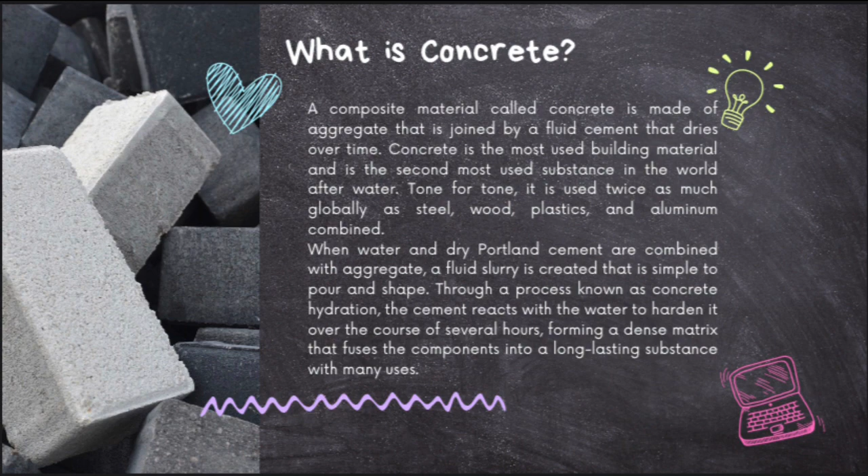The ambient temperature has a significant impact on how long concrete takes to set. To enhance the wet mix's physical characteristics, slow down or speed up the curing process, or alter the final product in some other way, additives are frequently added to the mixture.

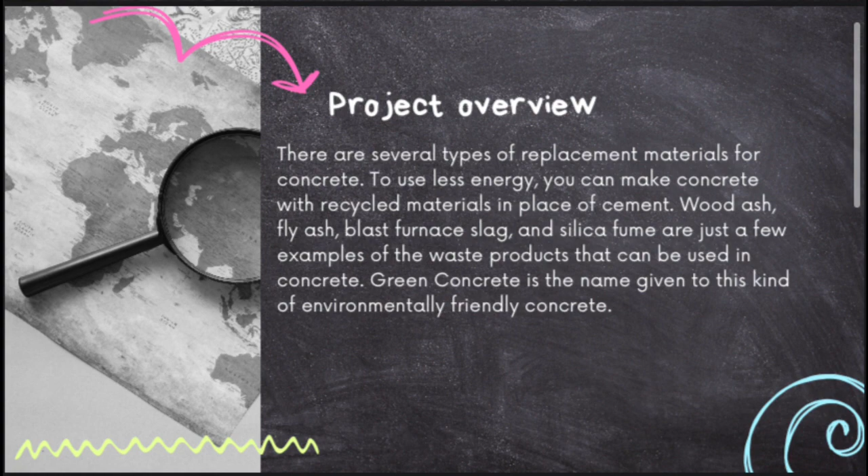Now, we are going to the methodology. First, the project overview. There are several types of replacement material for concrete. To use less energy, you can make concrete with recycled material in place of cement. Wood ash, fly ash, blast furnace slag, and silica fume are just a few examples of the waste products that can be used in concrete. Green concrete is the name given to this kind of environmentally friendly concrete.

The replacement of aggregate is a further efficient method for lowering greenhouse gas emissions from concrete. Many recyclable and reusable materials are now readily available for this use. Rubber, glass, expanded fly ash clay, and plastic material can all be used as substitutes for coarse aggregate in concrete. The alternative material for fine aggregate in concrete, however, can range from agro waste to industrial byproducts.

Okay, now we move to the first example of our product. First is papercrete concrete, an eco-friendly alternative of aggregate in concrete. The raw materials used for papercrete concrete include paper slurry, white lime or sand, and Portland cement. To create papercrete concrete, the waste paper needs to soak for about 24 hours.

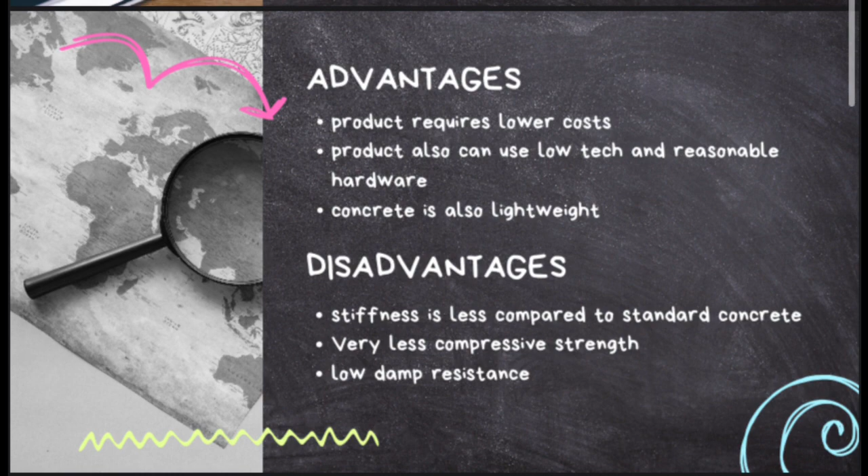Okay, now the advantages of our product: the product requires low cost. The product also can use low tech and reasonable hardware, and the concrete is lightweight. But there are also disadvantages of this product: the stiffness is less compared to standard concrete, very low compressive strength, and low damp resistance.

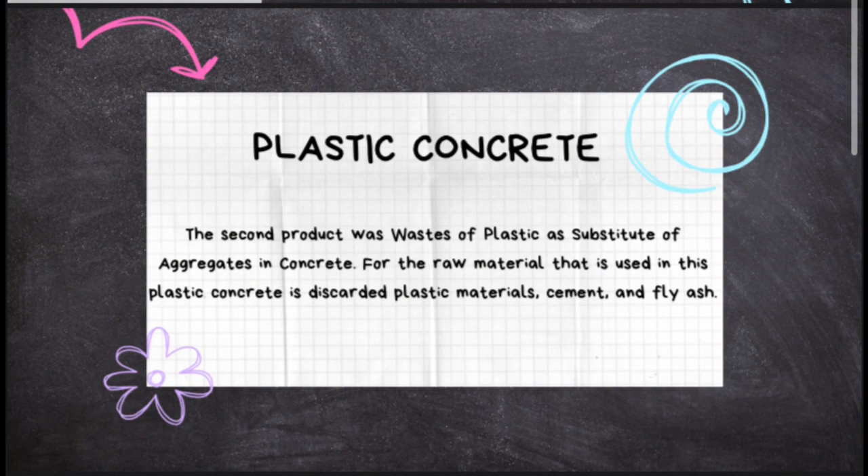The second product is plastic concrete, using waste plastic as a substitute for aggregate in concrete. The raw materials used in this plastic concrete are discarded plastic materials, cement, and fly ash. To create the product, the plastic needs to be shredded into smaller flakes. The plastic needs to be exposed to a harmless and short dose of gamma radiation. Then, the flakes need to be ground into fine powder. The ground plastic now turns to plastic powder, then mix it with cement and the fly ash.

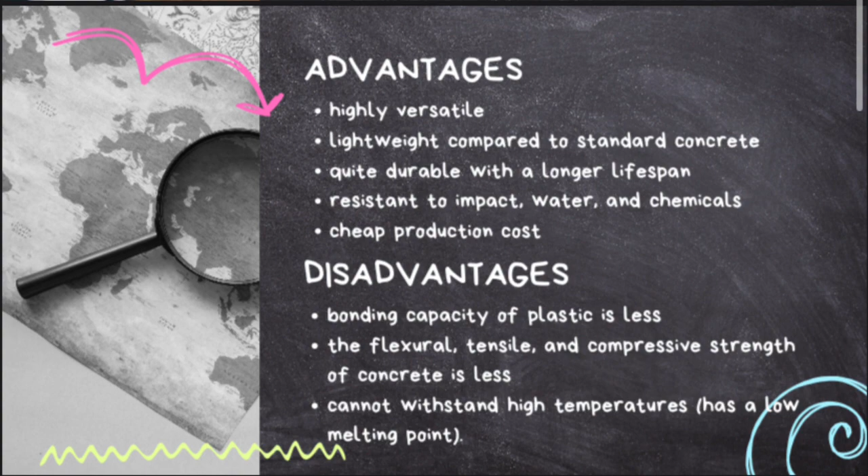The advantages are that it is highly versatile, lightweight compared to standard concrete, quite durable with a longer lifespan, resistant to impact, water and chemicals, and also has cheap production cost. The disadvantages of this product are that the bonding capacity of plastic is less. Then, the flexural, tensile, and compressive strength of the concrete is less. And also, it cannot withstand high temperature, which means it has a low melting point.

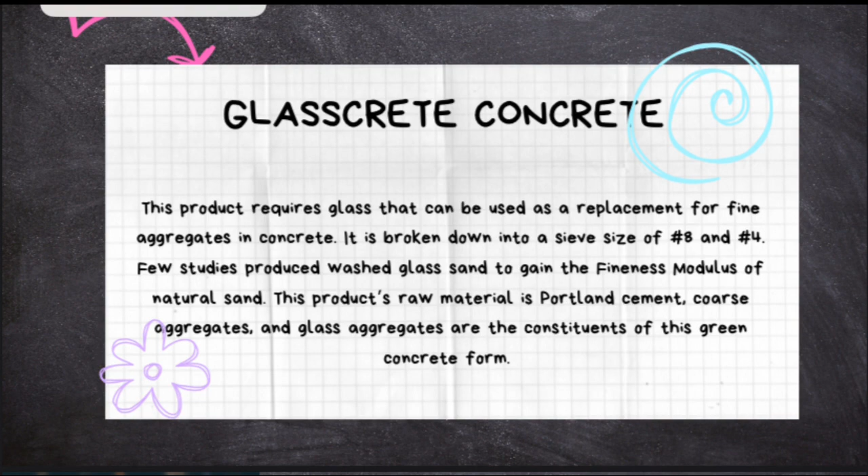So, the third one of our products is glasscrete concrete. This product requires glass that can be used as a replacement for fine aggregate in concrete. It is broken down into a sieve size of 8 and 4. A few studies produce washed glass sand to gain the fineness modulus of natural sand. Portland cement, coarse aggregate, and glass aggregate are the constituents of this green concrete form.

To create the glasscrete concrete, all materials need to be mixed together similar to traditional concrete. The desired glass aggregates also need to be created, and it will take a long time. Firstly, wash the broken glass granules and remove harmful organic materials. Dry the glass particles in an oven to make the drying process faster.

Then, cool down the glass granules and place these glass particles in the Los Angeles abrasion machine to obtain the glass sand. Finally, store the crushed particles for use as fine aggregate. The advantage of this product is that the workability of concrete with glass is better than with natural sand.

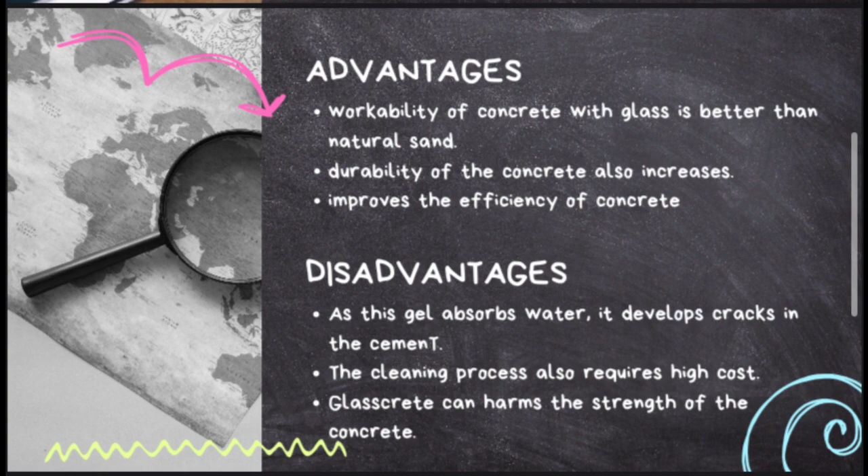The durability of the concrete also increases, and it improves the efficiency of concrete. But the disadvantage of this product is that as this gel absorbs water, it develops cracks in the cement. The cleaning process also requires high cost. Glasscrete can also harm the strength of the concrete.

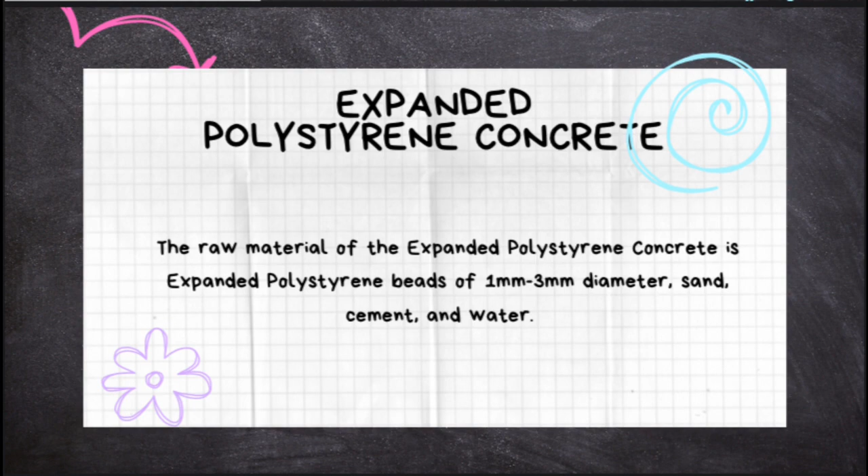The next concrete is expanded polystyrene concrete. The raw materials of expanded polystyrene concrete are expanded polystyrene beads of 1 mm to 3 mm diameter, sand, cement, and water. To create expanded polystyrene concrete, add water, sand, and Portland cement in the concrete mixer. Mix the material thoroughly, add a portion of styrofoam beads and keep mixing for a minute.

It allows the beads to absorb the water. Keep adding the desired amount of styrofoam beads and take time to mix it well. If the beads become stiff by absorbing water, you can add extra water. Stop mixing when the mixture comes to the consistency of low slump and a pourable texture. Pour this mix into a mold, place it on a plain surface and cover it with a plastic film. Leave the mixture for curing.

After 24 hours, remove the entire mix from the mold and allow it to cure completely. Keep in mind, curing will take about a month. You must keep the stone damp during this process. It will allow full strength bonding to occur.

The advantage of polystyrene concrete is that it is 88% lighter than conventional stone-based concrete. Its structural support requirements, like steel reinforcement and foundation size, are also smaller than average. But the disadvantage of this concrete is that the materials are sensitive. The strength is less than traditional concrete, and it can only be used as light decorative brick.

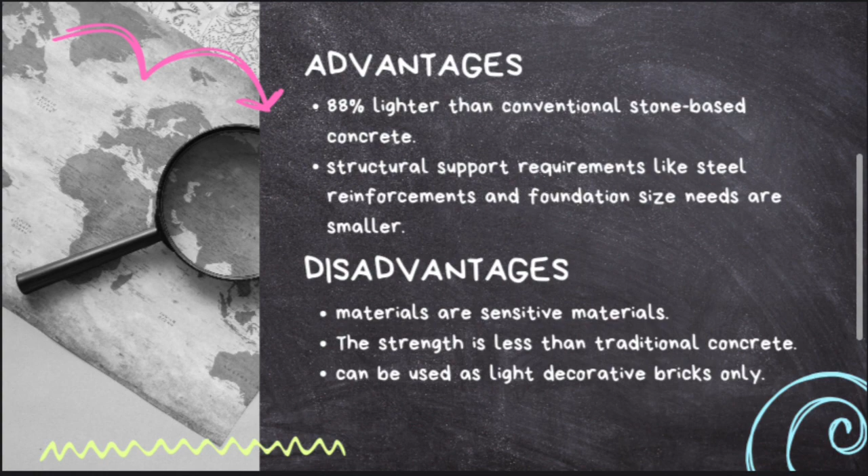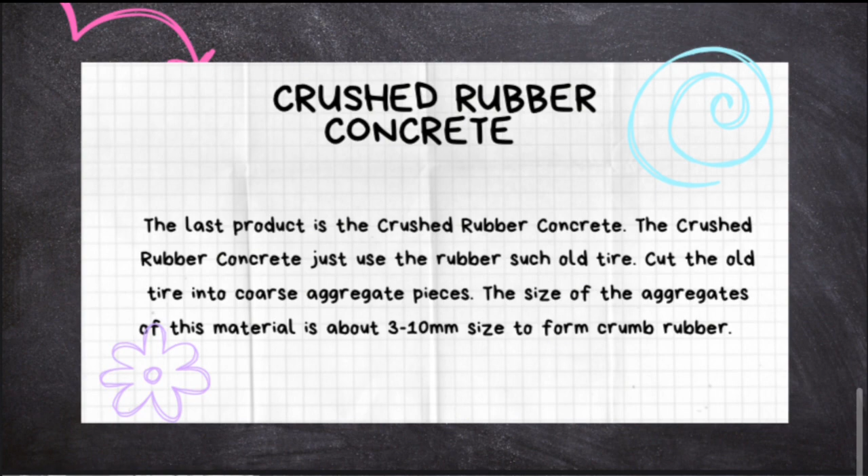And our final concrete is crushed rubber concrete. Crushed rubber concrete just uses rubber such as old tires. Cut the old tire into coarse aggregate pieces. The aggregate size of this material is about 3 to 10 mm to form crumb rubber. There are not a lot of advantages and disadvantages for this concrete. The advantage is that it resists the failure and shattering of concrete, and the disadvantage is the low compressive strength of the concrete mix.

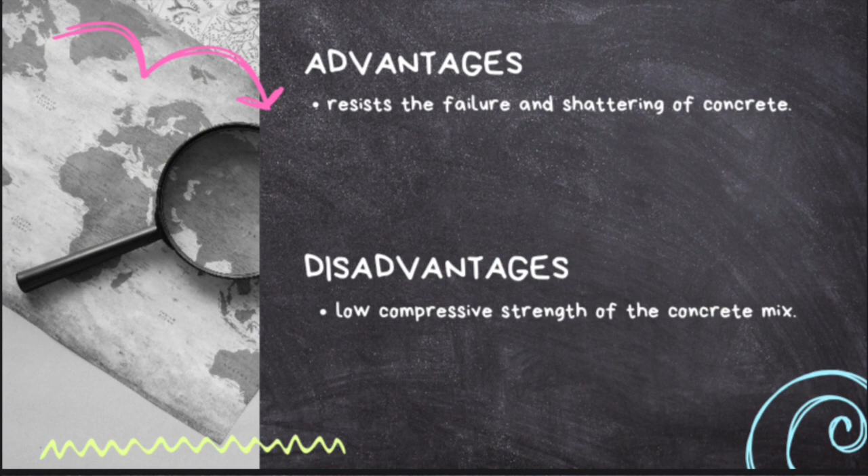Based on our findings and research, our product innovation can give a very positive impact and benefit in every aspect, such as economy, community, industry, and environment. For the economy aspect, recycling concrete has never been more advantageous or relatively simple thanks to modern technological advancement. For instance, aggregate can be created by processing plastic concrete with the concrete reclaimer. The production of a fresh batch of concrete using this aggregate is perfectly feasible without the use of fresh or virgin material. It is possible to crush even hardened concrete to the desired texture, which can be used as a high quality raw material for a variety of products.

Concrete recycling essentially adds value to material that would otherwise have been cost prohibitive for your company. The next time you see a pile of leftover or old concrete on your property, you will be aware that recycling presents both commercially and environmentally advantageous opportunities. Old concrete can be used in a variety of inventive ways. It can be used to create benches for public use, flower beds, pots, walkways, and paving blocks. You could also use recycled concrete to pave your yard. The options are countless and fascinating.

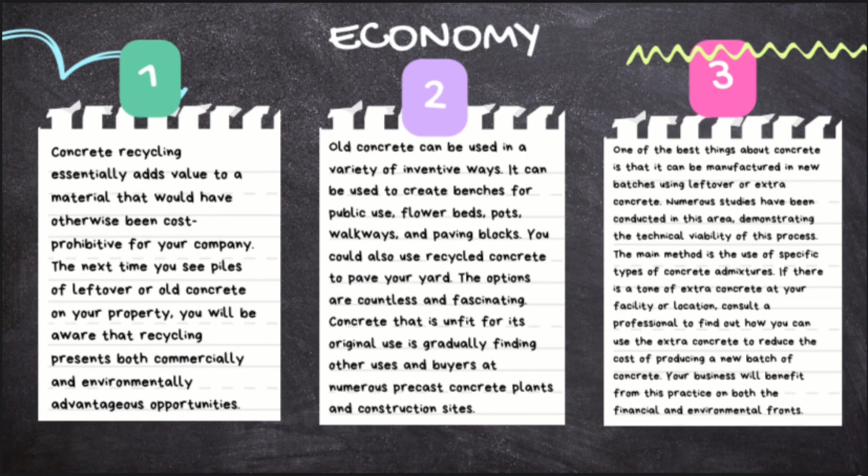Concrete that is unfit for its original use is gradually finding other uses and buyers at numerous precast concrete plants and construction sites. One of the best things about concrete is that it can be manufactured in a new batch using leftover or extra concrete. Numerous studies have been conducted in this area, demonstrating the technical viability of this process. The main method is to use a specific type of concrete admixture. If there is a ton of extra concrete at your facility or location, consult a professional to find out how you can use the extra concrete to reduce the cost of producing a new batch of concrete. Your business will benefit from this practice on both financial and environmental fronts.

Because of its adaptability, concrete can also be found in interior spaces like bathrooms and kitchens. The thermal mass, or the capacity of concrete to absorb temperature change help keep buildings comfortable while also being more affordable. Due to its durability, renovation and maintenance costs have also decreased.

Concrete is built to endure. It can absorb sound, control temperature and withstand strong shocks. Buildings made of concrete can last at least 50 years, but with proper maintenance, they may last for hundreds of years. Concrete's resilience and durability make it the perfect material to use when building structures that meet high safety standards.

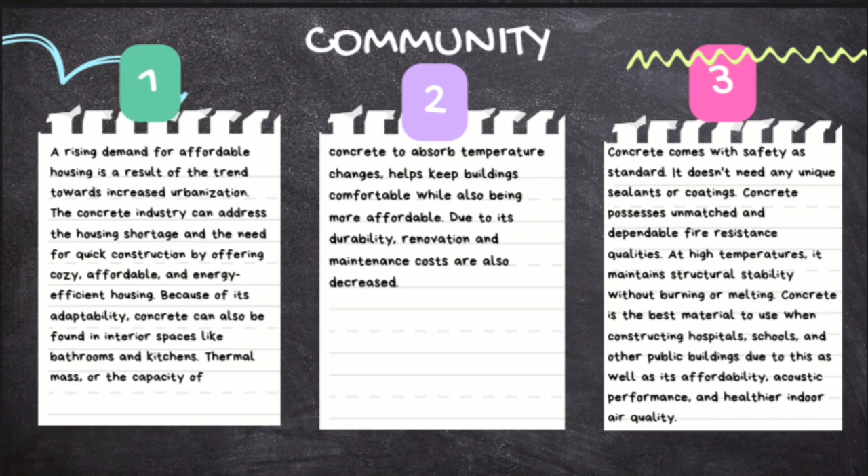Concrete possesses unmatched and dependable fire-resistant qualities. At higher temperatures, it maintains structural stability without burning or melting. Concrete is the best material to use when constructing hospitals, schools, and other public buildings due to this as well as affordability, acoustic performance, and healthier indoor air quality.

Our third aspect is industry. Concrete is incredibly simple to maintain and has a high level of resilience or durability. It frequently lasts for many decades without needing to be rebuilt. In comparison to buildings made from other, more brittle or combustible materials, insurance costs of buildings or other constructions made of concrete will be relatively low.

Concrete is a very well liked building material in the construction industry due to its low cost and durability. Concrete is widely accessible and reasonably priced without sacrificing strength or quality. It has amazing aesthetic qualities and versatility to express complex, dynamic, and beautiful forms, as architects and engineers can use concrete, which can be poured on site into any desired shape.

High strength concrete has undergone innovation over the last 30 years, giving designers more freedom than ever. Additionally, the finish, color, and strength can all be customized. The sector is aware of how its resource extraction operations affect the environment. For instance, the cement sector has created a precise set of guidelines for quarry rehabilitation under the aegis of the Cement Sustainability Initiative of the World Business Council for Sustainable Development.

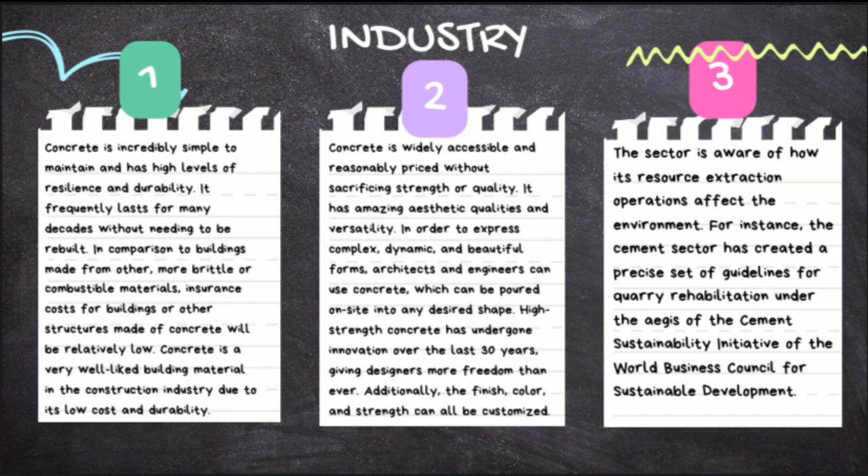And our last aspect is environment. Modern construction relies heavily on concrete. It has endless potential for innovation and fresh approaches to improving the material's performance, which offer a greater return on modest investment and significantly improve our daily life. Pervious concrete is one example of an innovation because it mimics how water naturally seeps into soil, reducing flooding and the detrimental effects of soil sealing.

In the meantime, photocatalytic concrete can purify the air of toxins like nitrogen oxides and carbon monoxide. Buildings made of concrete can save a lot of energy over their lifetime. Due to the high thermal mass of concrete structures, internal temperatures are unaffected by changes in the outside environment. This significantly lessens the need for additional heating or cooling. Increased energy efficiency is necessary because building energy use has the biggest impact on the environment.

As a result of its ultimate energy efficiency, concrete has been used in combination with certain heating and cooling technologies, including radiant floor heating and cooling systems and geothermal heating and cooling systems. To lessen its reliance on fossil fuels and primary raw materials, the cement sector uses waste-derived materials and alternative fuels.

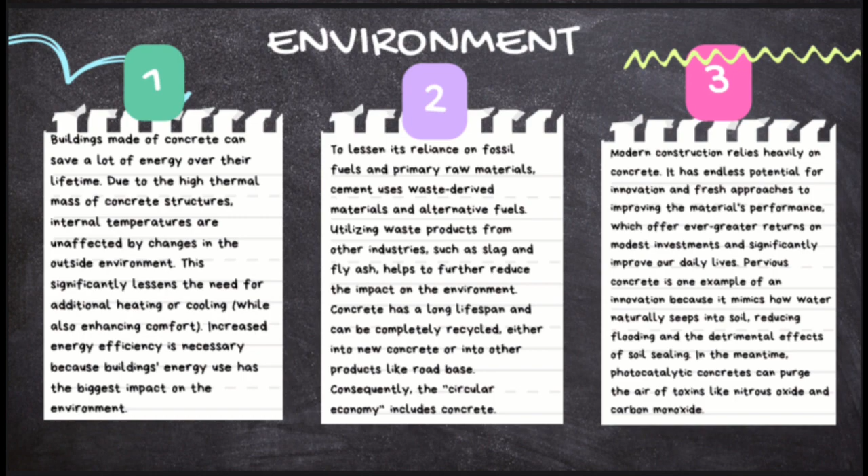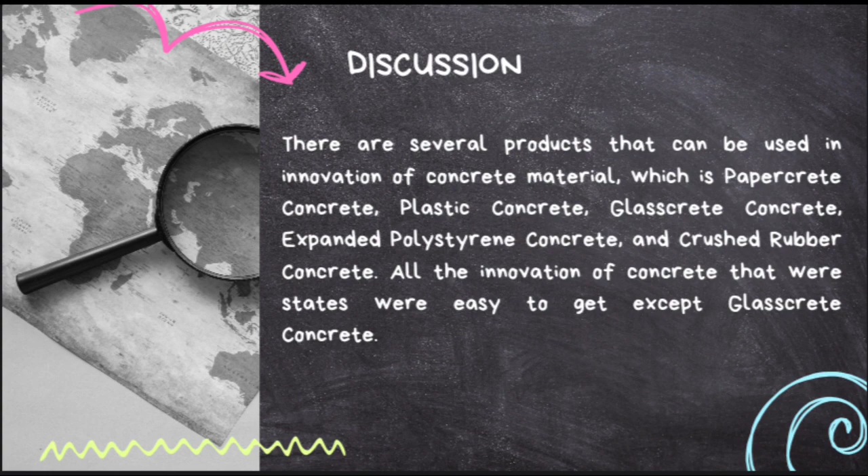So, the discussion is there are several products that can be used in the innovation of concrete material, which are papercrete, plastic concrete, glasscrete, expanded polystyrene concrete, and crushed rubber concrete. All the concrete innovations that were stated are easy to get, except glasscrete. The effect on the economy: the designers, which are architects and engineers, can design calmly without thinking about the cost.

The reduction in cost will make a lot of people who are involved happy. This case scenario also makes the community happy to buy a house or any building because the cost is reduced. Then the price will also be reduced. The effect on the industry: it will be more productive since there are many ways to create concrete which still has a high compressive strength, and can even reach the strength of normal concrete.

Also, the effect on the environment: our earth will be cleaner since there are innovations used such as crushed rubber concrete that uses old tires for the concrete. The usage of recycled material can also reduce waste material. So, the conclusion is our product can lower the cost of small construction such as renovation to save money instead. The reduced cost can give a lot of savings in money and also make the state stable because indirectly waste

material will be reduced. The efficiency of our product is worldwide because the waste that our product uses is found in all different kinds of states. So it is better to use our product because it can reduce the cost, can save the earth, and the most important thing is making all the parties involved feel blessed.